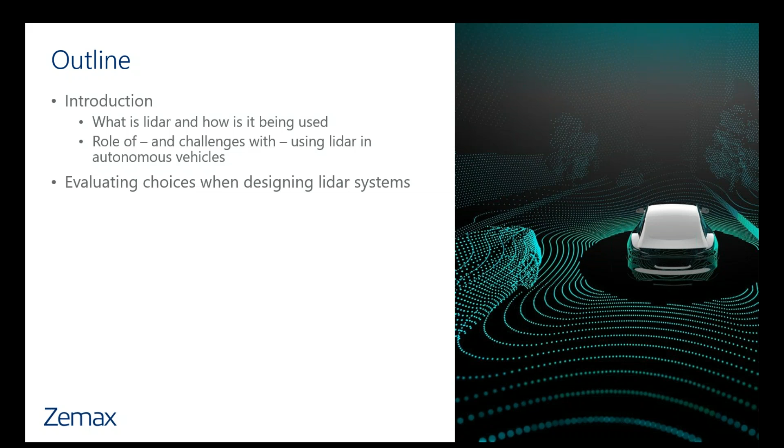And so I want to talk a bit about what drives some of those choices, what are some of those technical considerations that we have to think about when we're designing a LiDAR system, and how we can evaluate those choices and make those trade-offs using virtual prototyping, being able to quickly and efficiently use simulations in guiding the best design decisions that you want to make for any particular application.

We'll look at this actually through two simple but specific examples using the Zemax virtual prototyping software solutions. And then for one of those examples, we'll do a little bit of a deeper dive and look at the as-built performance and how as-built performance would affect the results that you would get from a LiDAR system. And so this is accounting for things like environmental effects on the system performance, optical tolerancing, so the manufacturability of the optical components and how that would affect the performance of the system, as well as starting to evaluate the impact of mechanical design on the system.

I'll finish up then by talking about my thinking on next steps for LiDAR systems that are used in autonomous vehicles, and then provide a brief summary.

So what is LiDAR and how is it used more generally? Well, LiDAR is just a method that uses light waves to determine the range or the distance to an object. It's very similar to radar that's been around for a long time, but instead of using radio waves, we're now using light waves. LiDAR is commonly used in a variety of applications.

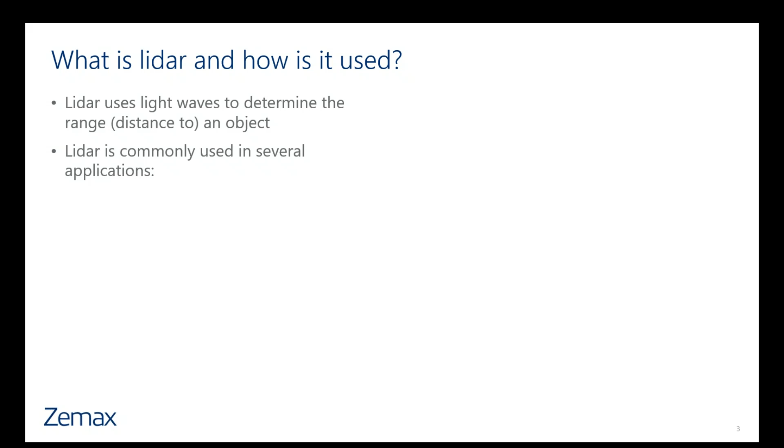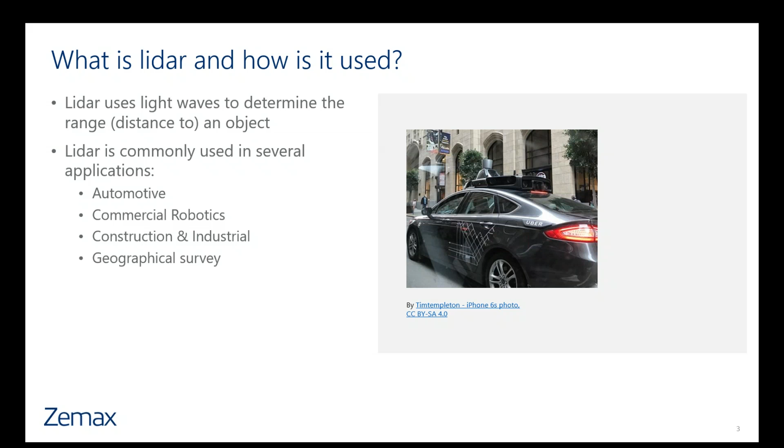These include the automotive industry, and as we'll be talking about here specifically in autonomous vehicle designs. But it's also been used with commercial robotics, inside of construction or industrial environments. As a tool for geographical survey, this is maybe one of the more common applications that users may be familiar with. And as we see here, this is an example of a topographical map that's been generated by the U.S. National Park Service using a LiDAR system. In a variety of military applications, and then finally also in commercial transportation, so trucking, railway, etc.

So LiDAR has been around actually for quite some time, but one of the key points that I want to make is that in many, if not most of these applications, the solution that's been implemented has been a custom and expensive solution. So it usually tends to be something that's very application specific and therefore at a high cost. And so one of the goals of virtual prototyping is to be able to come up with a solution that is low cost, that can be mass produced.

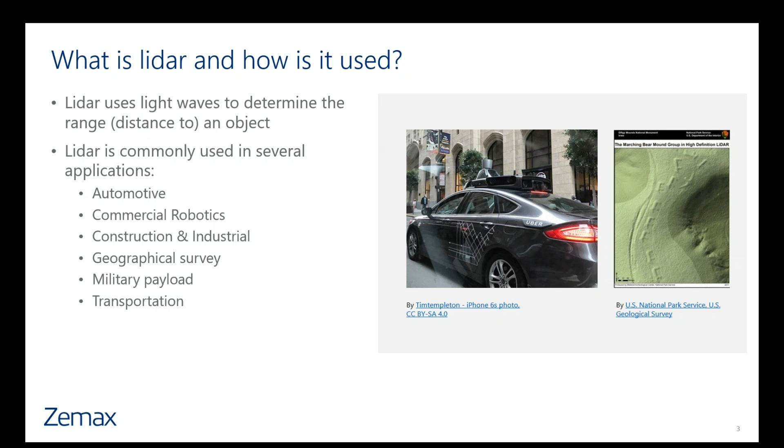Now, what would the role of LiDAR be in an autonomous vehicle system? I think we want to start by defining what we mean by autonomy.

There are international standards which define autonomous driving, ranging from level 0, which indicates full driver control with no automated assistance whatsoever, to level 5, which is full autonomy of the vehicle, in which the vehicle performs like a human driver under all conditions.

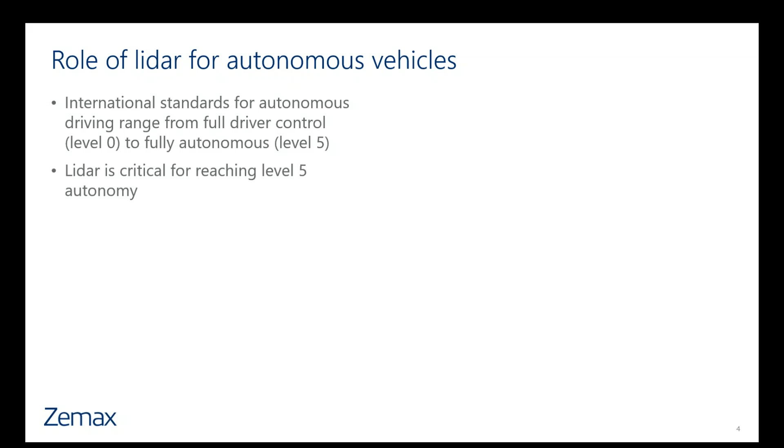LiDAR is a critical component for reaching this level 5 autonomy, as we'll talk about here in a moment. But it won't be the only component required to reach level 5. To reach this full autonomy, we really need a variety of systems.

These include short, medium, and long-range radar, as well as visible camera systems, ultrasound systems, and LiDAR systems. As you can see in this diagram, where LiDAR is thought to be most effective is really in this intermediate range of detection for the vehicle, where we're interested in collision avoidance and pedestrian and obstacle detection at ranges typically 30 to 100 meters, or about 100 to 300 feet.

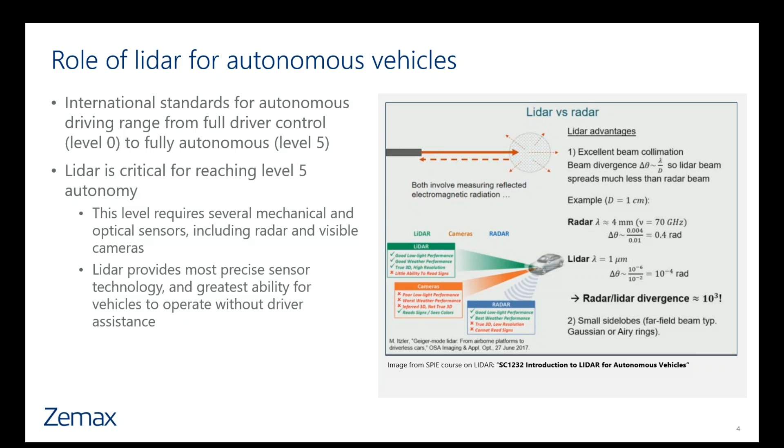Within that range, LiDAR provides the most precise sensor technology we have available. It has significant advantages over camera and radar within this range, resulting from the short wavelengths we're using for range detection, as opposed to the longer wavelengths used by radar systems.

What I've shown here, and I'll play a video shortly, is just a basic example built up within the Zemax OpticStudio software package to illustrate the concept of how a LiDAR system might work. This is an example of a pulsed scanning system.

What we have here is basically just a light beam illuminated from a system on a vehicle, as shown here. That light beam is going to be scattered off a target in the far field, with a pedestrian in the way.

By looking at the path length, which corresponds to the time the light travels as it goes from the source out to the wall, we can get an indication of the obstacles between the light and that target. Now, LiDAR systems, as I'll talk about a little later, are actually a bit more complicated than this, but I wanted to show this as a basic example.

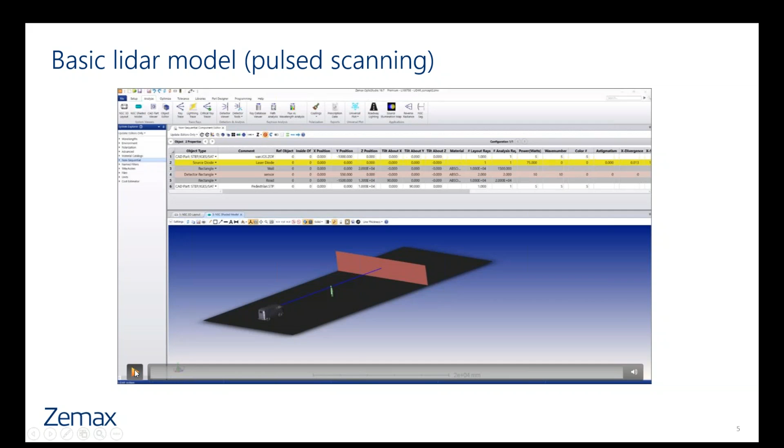In the software, we've set up a simple source where we can scan that source, and you can see that scanning occurring here as the beam moves across the target. We can then measure the distance that beam travels as it scans.

We can do that in a two-dimensional fashion using a tool within our software called the universal plot. This allows the user to define a two-dimensional scan of the beam, and in this case we're doing that over both the horizontal and vertical direction, in a range of about 2 to 3 meters in each dimension.

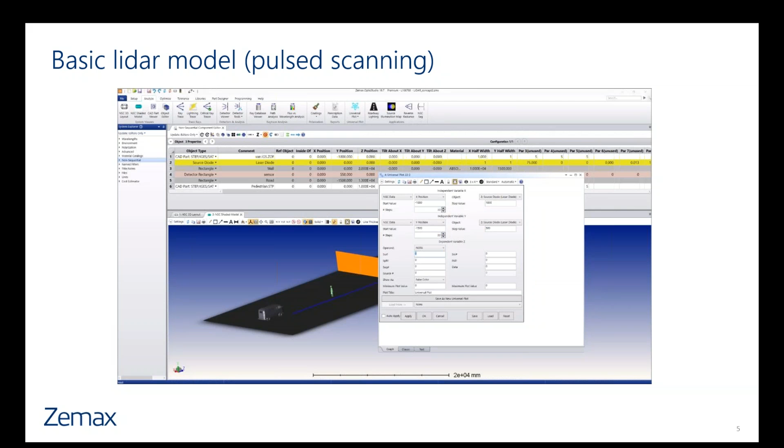Having done that, we can look at the path length the ray travels as it propagates, and we'll see that path length is affected by the obstacle in the field of view of the beam as it travels to our target. You can see here actually the outline of the pedestrian shown by this simple analysis.

So this is a very basic analysis that shows how a LiDAR system can work, by looking at the path length, or the time of flight, of the beam as it propagates from the source out into the far field.

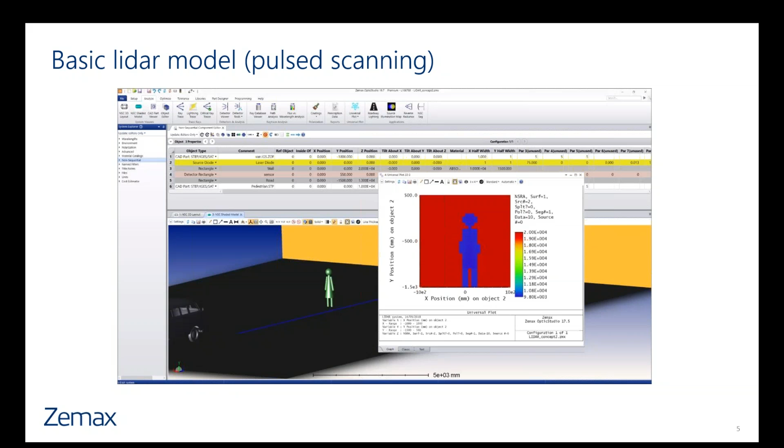Now, what are some technical considerations for using LiDAR in autonomous vehicles?

The first is that the systems need sufficient range to be able to capture information about traffic that's traveling at different speeds across the full field of view that's of interest. This requires that these systems have accurate measurements that have good resolution in the transverse, or perpendicular, direction, but over the full horizontal and vertical field of view.

By horizontal field of view, we mean that we want to be able to scan this full 360 degrees relative to the driver position, so that the LiDAR system should be able to see both in front and in back and along all sides of the driver.

We usually want a field of view in the vertical direction, or along the line of sight of the driver, in the range of about 20 degrees, starting from just a little bit above the driver's line of sight down to about 15 degrees or so below that line of sight. That's a typical vertical field of view required for the LiDAR system.

What we're looking for in terms of resolution is going to be much smaller than that. We're looking for the ability to detect objects or obstacles in that field of view with a resolution anywhere from a fraction of a degree up to a couple of degrees, maybe an order of magnitude smaller relative to the full field of view we're trying to capture. To translate that into numbers, for an object that might be 20 meters or about 60 feet away from the driver, we're looking at being able to detect objects that are about 7 centimeters in size.

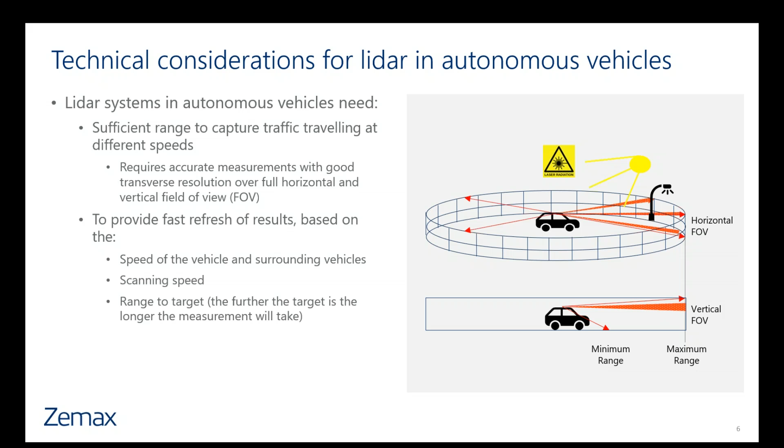Now, we also need this data quickly, because the scene that the driver is seeing is changing as traffic is changing, as the vehicle the driver is in is moving itself. We need a fast refresh of these results based on the speed of the vehicle and the surrounding vehicles. The scanning speed, the speed of the light source itself, will determine the resolution and accuracy of the LiDAR system, and the distance of the source to that target.

Some other technical considerations for LiDAR systems in autonomous vehicles are that these systems have to have robust performance in a variety of environmental conditions over the full lifetime of the system. We need to make sure we're collecting enough light from these various obstacles in the field of view, independent of weather changes or background conditions, such as the amount of ambient sunlight incident on the system. And again, as the detector ages over its full lifetime, which may be on the order of years, depending on the life cycle for replacement of these systems on the vehicle.

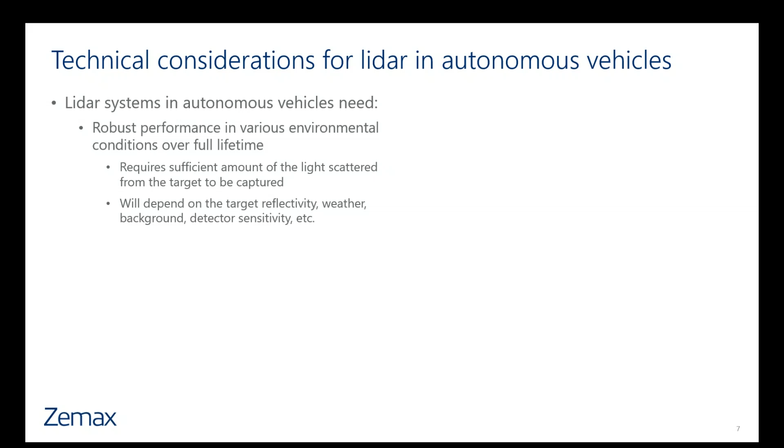Now I want to show a schematic that shows in a little more detail how some of the fundamentals of these LiDAR systems work, starting with the transmitter or lighting component. This is the light source that's going to illuminate the field of view and tell us what's out there in front of the driver.

What we have then is that light hitting the targets or objects in the driver's field of view and being scattered back to a detector on the vehicle itself. The amount of power received on the detector depends on how much power is on the target, and the power that reaches the target depends on factors such as the power of the laser, how much of that power can be transmitted through the atmosphere as a function of atmospheric conditions like weather, and the size of the beam we can achieve on the target.

The tighter the beam we can make on the target, the more power we can deliver on it, but we also need to ensure we're getting high enough resolution to capture all the information about the target of interest. To optimize for that beam size on the target, we often provide optics between the laser source and the target, to provide the right beam profile on the target itself.

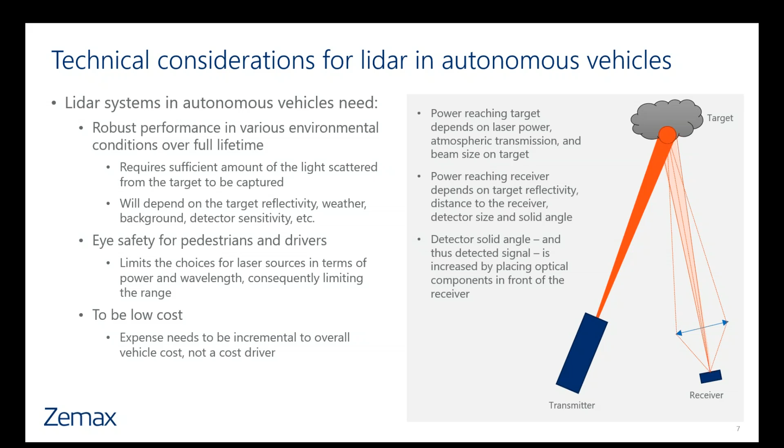So part of the exercise here is to come up with the best design and identify the best trade-offs to drive the cost down as much as possible.

Now, as I mentioned earlier, there hasn't been a clear-cut solution or winner identified. There are still a lot of players working on a lot of different solutions throughout the industry, involving different types of sources, different wavelengths, and different detector or sensor technologies.

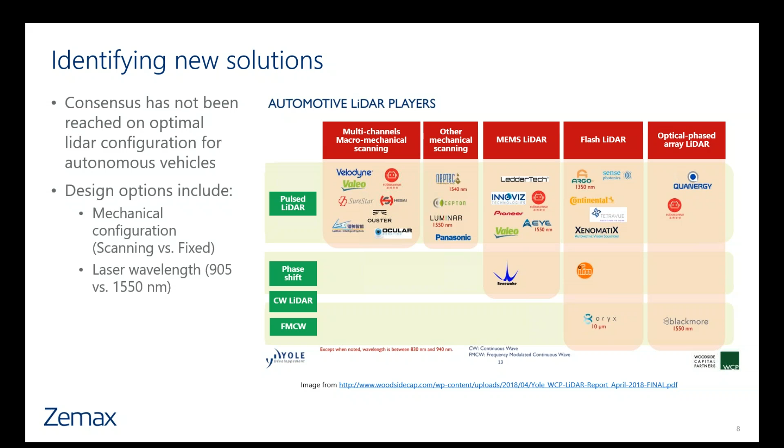I'll talk a bit about some of the design options available for LiDAR, including the mechanical configuration: whether you want a scanning laser or a fixed system, the wavelength used for the laser, and whether you use a pulsed system, as in my simplistic example earlier, or a continuous wave laser model. We'll discuss the pros and cons of each of these design choices.

Starting with mechanical versus flash systems. What we call a mechanical system—which I'll also refer to interchangeably as a scanning system—has basically a single laser on the vehicle that sends out a short pulse. We look at the time it takes for that pulse to hit targets in the field of view and return, so it's a time-of-flight measurement. To capture data over the full field of view, we scan that laser in a 360-degree arc around the top of the vehicle.

The advantages of scanning systems are that you can capture the full field of view with a single system, and these systems generally work at high resolution, giving very good accuracy. The disadvantages are that they include mechanical moving parts, making them more expensive and more sensitive to wear and tear, misalignment, optomechanics, and things of that nature.

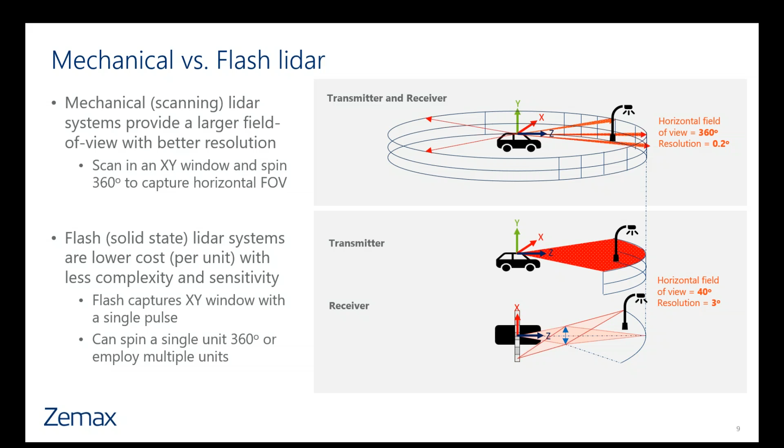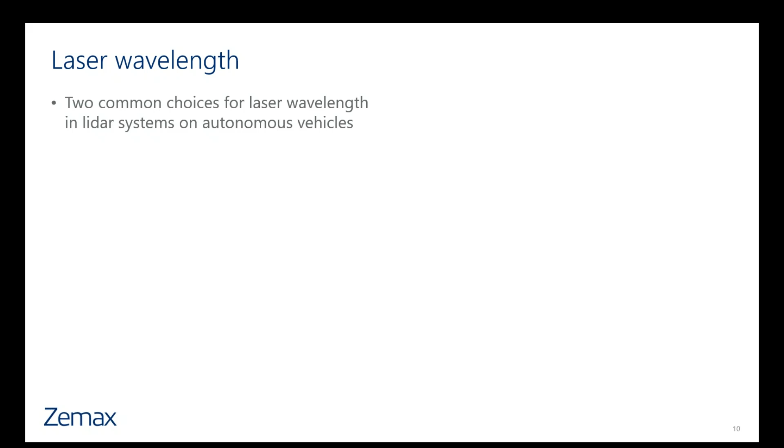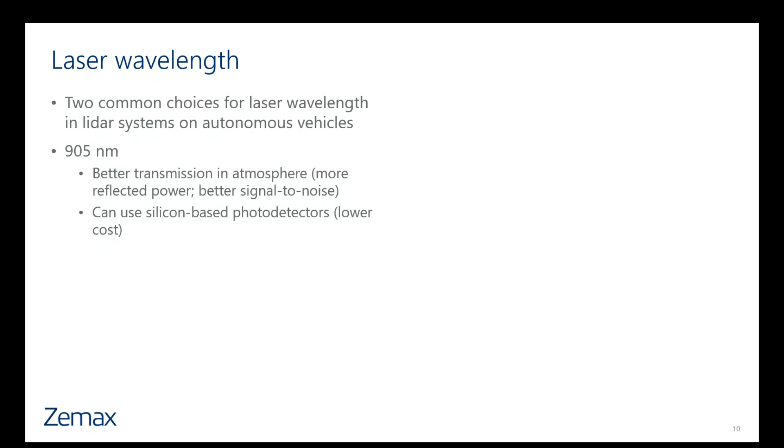Another design decision you can have in a LiDAR system is what laser wavelength to use. There are two common choices for wavelength in these systems. The first is 905 nanometers, closer to visible, kind of in the near IR. The advantage of these wavelengths is that you get much better transmission in the atmosphere, so you get more power returned to the detector and therefore a higher signal to noise. With these, you can use traditional silicon-based photodetectors, which can be purchased and implemented at lower cost.

This is just some data which speaks to the first point about transmission. The transmission through the atmosphere generally follows an exponential relationship, with a dependence on the distance to the target as well as an atmospheric extinction coefficient, which is a function of wavelength and of course the atmosphere and weather conditions. You can see from this plot of the atmospheric extinction coefficient as a function of wavelength that this value is smaller at smaller wavelengths and increases as you go to higher wavelengths. A smaller value here corresponds to higher transmission, so the lower wavelengths give you better performance in terms of transmission.

Now, the disadvantage is that the eye tends to be more sensitive to these lower wavelengths, so you do have concerns with eye safety. As we go up to higher wavelengths, up at 1550 nanometers, this is where you have better support for eye safety. You have less probability of that light coming back and hitting the retina in the back of the eye, and therefore you can use higher power lasers at this higher wavelength because less of that light makes it back to the vulnerable retina. The other advantage of using the higher wavelength is that there tend to be lower levels of ambient or background light at these wavelengths, so you don't have to worry about noise coming from sunlight or other environmental light sources contaminating the detector signal.

One of the disadvantages of using the higher wavelength is that it requires non-silicon photodetectors, but there have been some advances made recently in the use of avalanche photodiodes with high efficiency that can be used to capture light at this wavelength. So we are seeing an industrial shift of LiDAR systems moving more towards these higher wavelengths as a result.

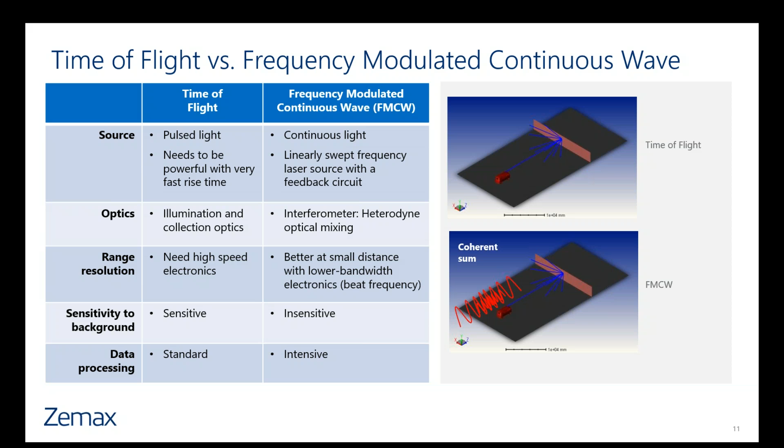But again, these are all the kinds of design decisions that users, or companies, need to make as they're designing LiDAR systems for autonomous vehicles. And as I said, there's really no clear choice or clear solution in the marketplace.

And so as we think about what's driving cost, and that's really what the company is thinking about in terms of their bottom line, these are issues like system complexity, performance, what the system performance requirements are, and the ability to get those systems into mass production.

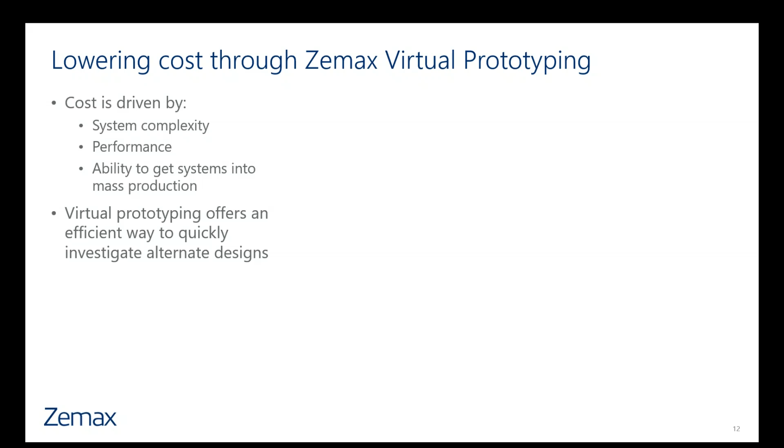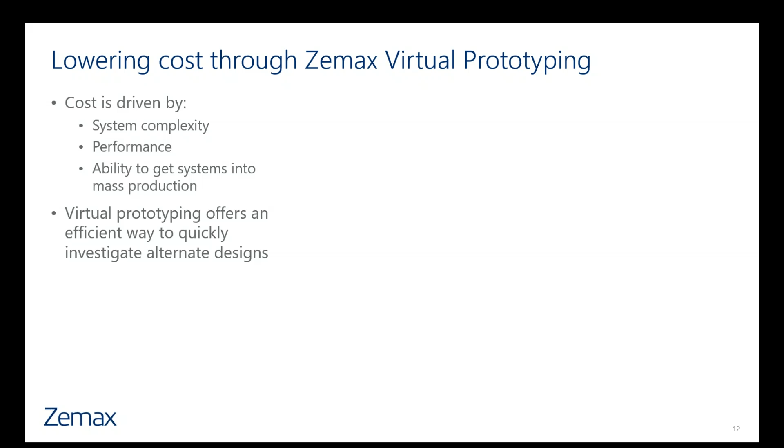And really the most effective way to determine what the right system is for the application a company may be employing is to use virtual prototyping. And what we mean by that is to be able to use simulation through connected software tools that give you end-to-end information about your design.

This can be through the user interface. This can also be through programmatic investigation of systems using application programming interfaces. But there's a lot of flexibility when we talk about using virtual prototyping and simulation to be able to design these systems virtually, to find what the best trade-offs are going to be for the application of interest.

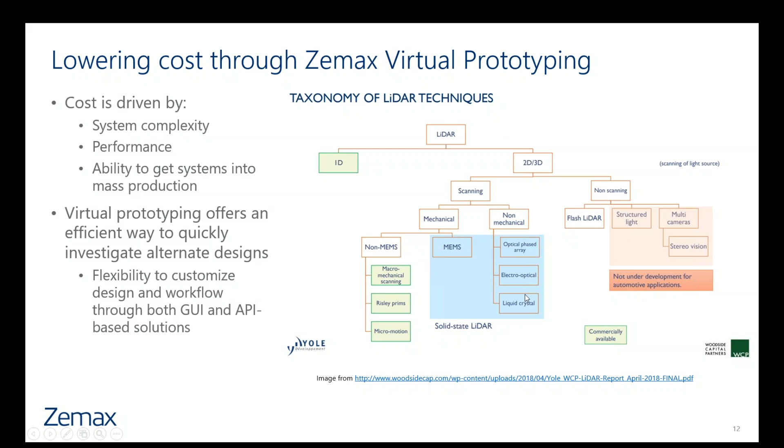And this plot here is really just meant to show the variety of options that are available as we think about LiDAR systems, and that really the best way to investigate this entire solution space is through simulation and through virtual prototyping.

What I'm going to be focusing on now in the remainder of this webinar is going through a couple of different examples where we'll use the Zemax software tools to look at some systems you can employ for LiDAR. One will be a mechanical spinning pulse system, as I showed earlier. The other will be a flash solid-state LiDAR pulse. These are similar systems in that they're both based on time of flight measurement, but they have slightly different specifications that I'll get into some details on.

For each of these designs, we'll provide the system setup within the software, as well as evaluate and optimize the performance. And then for the mechanical LiDAR system itself, we'll go ahead and do a deeper dive, looking at the environmental impact on performance, the effect of tolerances, and preparing the system for optomechanical design.

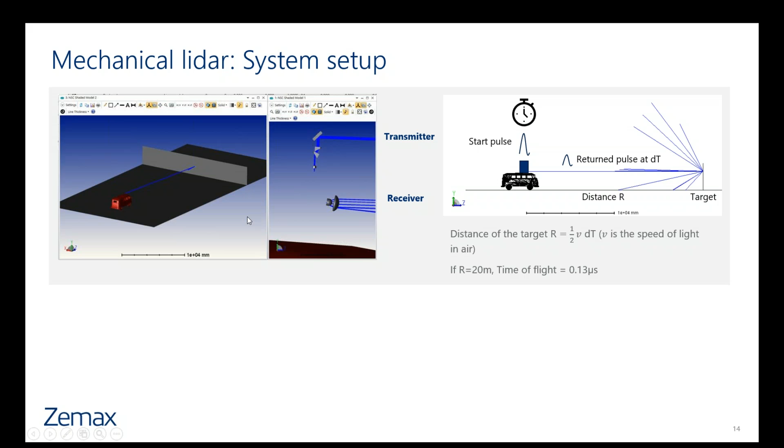So this is just an example of the mechanical LiDAR system set up within the Zemax OpticStudio software. You can see the scanning taking place here through this GIF. We're doing just a short scan, not over the full 360-degree field of view, but just as an example, over a shorter field of view, to show how the components themselves would move as we try to scan the system through the full field of view.

In this case, the source is just a single laser diode source. That source would be scanned in principle over a full 360-degree field of view to provide information about the horizontal and vertical position of the target, the X and Y, and then the time of flight—the time it takes for light to go from the source to the target and back—gives us information about the distance or range to the target.

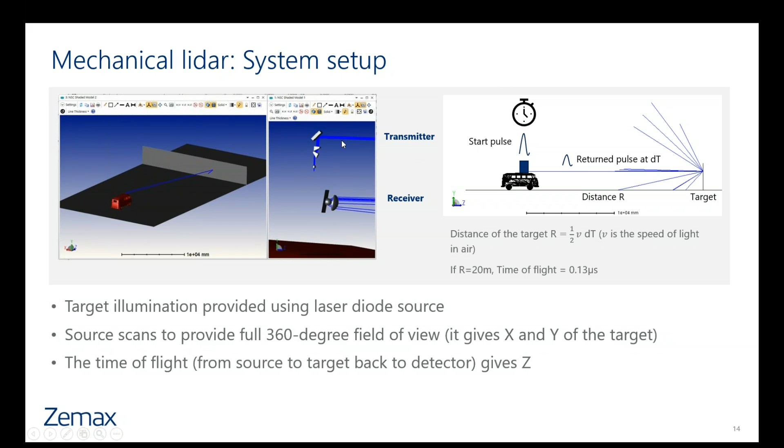Now, as I mentioned before, with these time of flight or pulse systems, we often have optical components both in front of the transmitter as well as in front of the receiver. But we can model these within the software—we can actually model each of these optical components separately.

So we can have a model for our transmitter optics, where the goal is to generate a collimated beam that reaches the target with a small spot size, so that we can have high resolution on the target. In order to generate this beam, we'll have optics which include both aspheric lenses and prisms. So really want to emphasize that free-form optics play a critical role in the design of these optical systems within LiDAR.

In this particular case, we're using prisms that we've taken from the Thorlabs catalog, and they've been implemented in the software as CAD models. But OpticStudio has the ability to support both CAD as well as native geometries for freeform optics.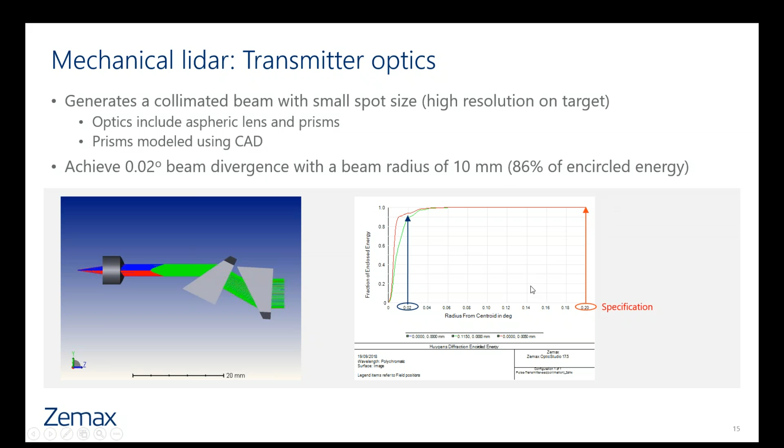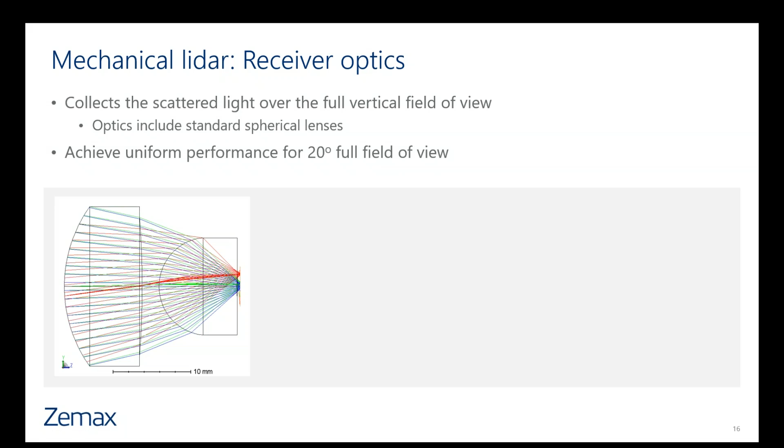But even with these traditional components, we're able to achieve uniform performance over a 20-degree full field of view. Again, in this system, we weren't doing a full 360-degree scan—we were just looking at a limited scan. But even so, we were able to achieve good performance with this two-lens system.

Here you can see a plot which shows the beam size received back on the detector as a function of that field of view. You can see that it's fairly uniform over the field of view—this is showing the half field of view. And if we look at this in terms of the encircled energy, how much energy is captured within the field of view, you can see that the majority of that energy is captured out to a 10-degree half field of view before we see any significant drop in the energy collected at the receiver.

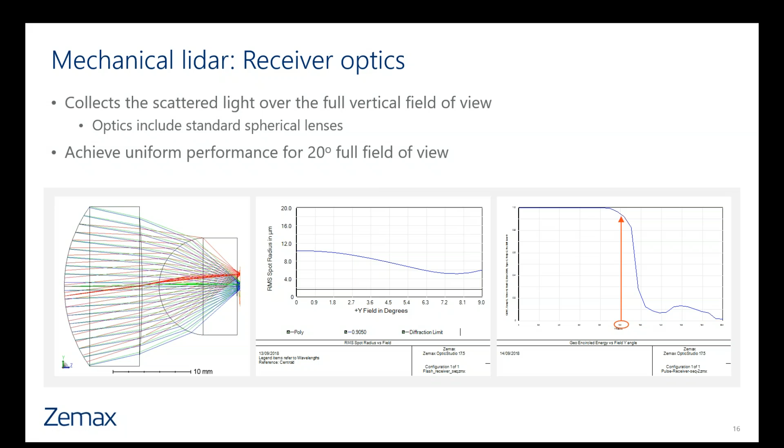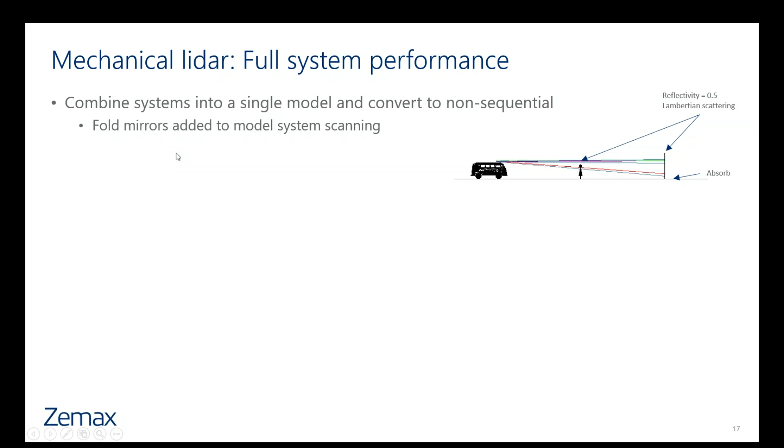Now, in order to evaluate this full system all up, we can combine the transmitter optics model and the receiver optics model into a single model by converting this system from what we've been using previously, sequential mode in OpticStudio, into a full non-sequential design. What I show here is just a schematic of what the system is meant to look like. We put together the full system into a single model where we also include fold mirrors in order to model the system scanning.

This is to account for the fact that we need to capture data over the full 360-degree field of view. We can see now the detector results shown as we look at these different scan angles as we go over the full field of view.

One of the most useful pieces of information in putting together the full system into a single model is to look at the amount of power that's received back in the system. So rather than looking at the beam size, we're looking at the energy distribution on the detector.

In this case, we're looking at the results for a single configuration, a single scan at 45 degrees, where the power of the source is 75 watts. We can see that the power is significantly reduced. This is really one of the challenges we have with LiDAR systems in autonomous vehicle design: while the power of the source may be on the order of watts, the power detected at the receiver is on the order of microwatts. So we really have to have very sensitive detection in order to see this signal.

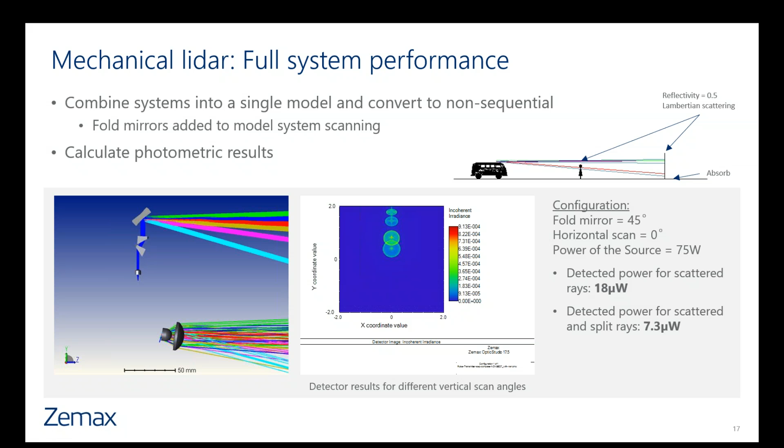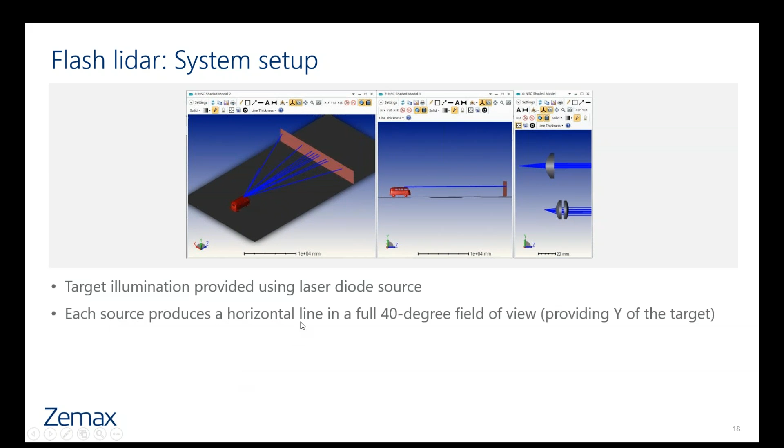Each source within the array will produce a horizontal beam over that full 40-degree field of view, so within a single pulse of that source, we capture information about the full field of view. The receiver then focuses light onto a detector array, which tells us the horizontal position the light came from, and by knowing which source the light was emitted from and where it falls on the detector, we can get the XY, or horizontal and vertical, position of the beam on the target. And again, this is a system where we use time of flight to measure the distance to the target.

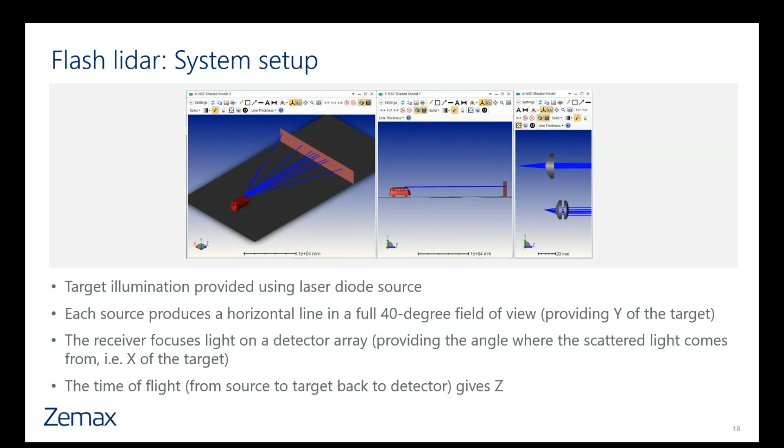Just as we've done for the mechanical LiDAR system, we can break this system up into two separate components that we model in so-called sequential mode of OpticStudio. The first are the transmitter optics, the optics in front of the laser source.

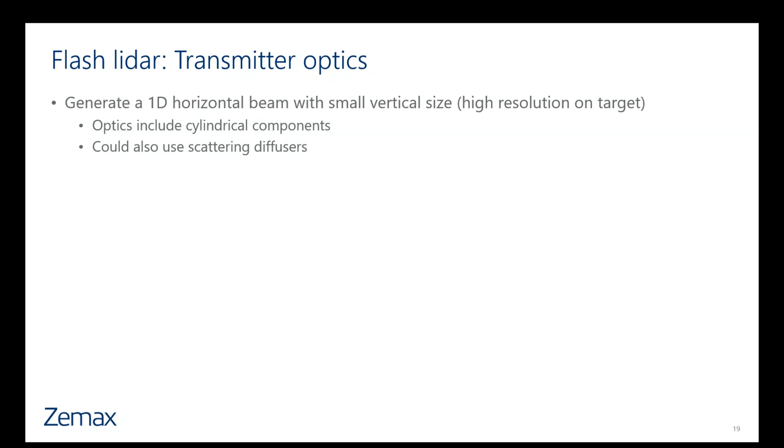In this case, our goal is different than it is in the mechanical LiDAR system. Here we're looking to generate not a small beam size on the target, but a horizontal beam, because we want to capture full information in the horizontal field of view with a single pulse. But we still want high resolution on the target, so we still need a small vertical size to that beam. In this example, we're using cylindrical components, but another option could be scattering diffusers. There's a variety of options available, and either could be modeled within the OpticStudio software package.

For the system as we've built here, we were able to achieve roughly a half degree full field beam size over that 40-degree field of view. This is looking at three different beams, meant to represent three different sources in the source array for the flash system. You can see each has a really tight beam size in the vertical direction, but which are well separated. This is a key piece, because we need to make sure the beam, as it reaches the detector, doesn't overlap, so we can get discrete information about the horizontal and vertical position from each beam separately.

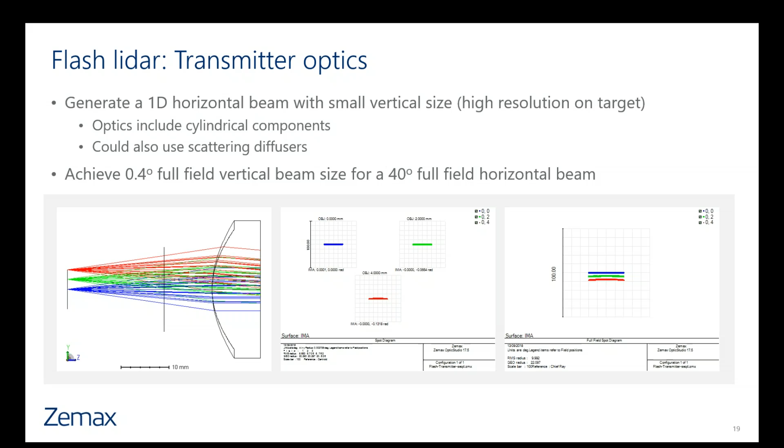Now we have a separate model again for our receiver optics. The goal is for the receiver optics to collect the scattered light over the full field of view at the required angular resolution. The specification in this model is an angular resolution of 3 degrees in the horizontal plane, and in the vertical plane to collect all of the light over the full field of view.

This is a schematic showing the lenses we've used to model the receiver in the horizontal plane, again just using spherical lenses in this particular example to keep costs down. We're actually able to achieve a vertical angular resolution better than the specification, getting a 1 degree field of view.

You can see here from each of the diode sources being captured on the detector a clear separation between the sources, which indicates we're able to discretely and with good definition capture information from each source separately. This is another way to see that information, looking at the enclosed energy received on the detector - 100% of that energy is captured for each diode source before we begin to capture any information from any of the other sources.

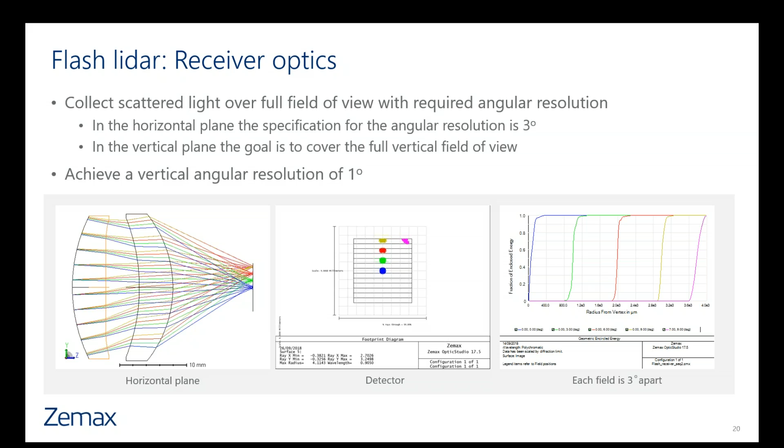Now we can put these two systems that have been modeled separately back into a single system to evaluate the full system performance. This is done by combining each of the individual systems into a single model and converting that model into the so-called non-sequential mode of OpticStudio.

In this case, all of the sources have been modeled simultaneously, and you can see all of those sources illuminating the target simultaneously. The receiver then samples different parts of the target on different pixels within the detector array, and that's how we can distinguish information about the horizontal and vertical position of where the light struck the object.

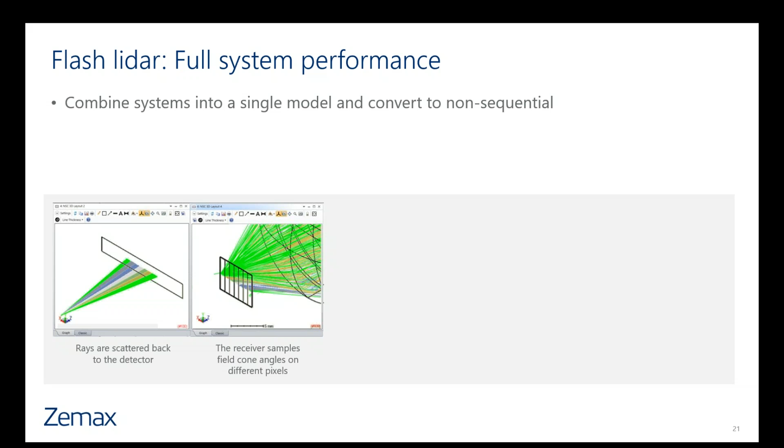One of the advantages of looking at this model in non-sequential mode is being able to evaluate the photometric results, to look at the power received on the detector. For a source at 75 watts, the total power on the detector is down in the microwatt range. In this system, there's about 40% less power received on the detector relative to the equivalent mechanical LiDAR system.

So in this system, we see about 11 microwatts received on the detector as opposed to 18 microwatts in the mechanical LiDAR system. It would be a bit more sensitive to signal to noise in this case as a result.

Another potential issue with this system is if we look at the actual power distribution on the receiver, you can see it's not as uniform as we might like. We'd ideally like to see a nice flat top of power on the detector. To achieve that more uniform distribution, we might need to redesign the receiver optics to include more sophisticated components, like diffraction gratings or other micro-optic components, to tailor the energy distribution on the receiver to be more flat and uniform.

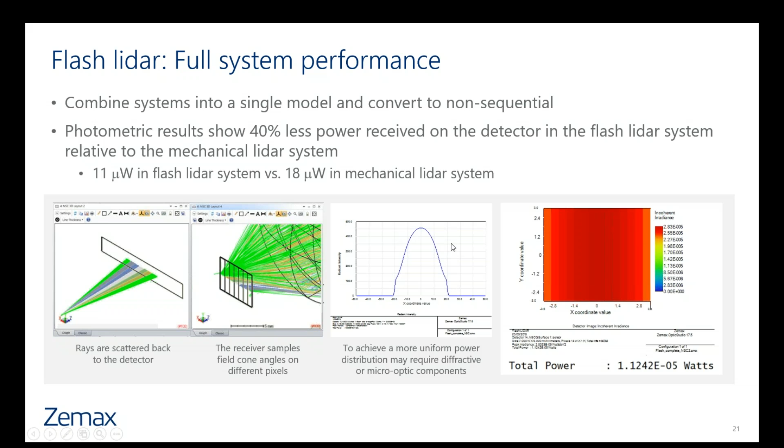Now, for the mechanical LiDAR system, we'll talk a little bit about how we would move this down into as-built performance, or modeling the as-built performance. One of the first effects we might want to consider is environmental effects.

Right now, within the simulation, we can look at how we affect both the reflectivity of the obstacles that light is being scattered from, as well as the model that characterizes the scattering distribution. The current model used in the previous analyses assumes a target reflectivity representative of standard aluminum, as well as an idealized scattering model.

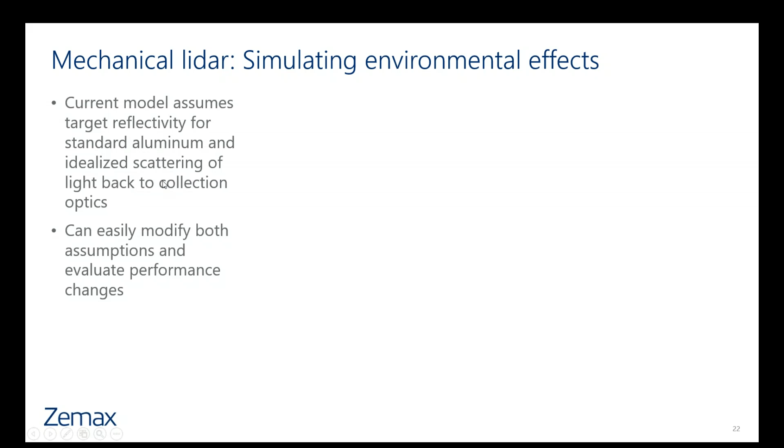But we can easily modify both of those assumptions. Within the interface of the software, we have options to change the coating on any of the components in the model, and that's what allows us to change the reflectivity within the model. We can also change the scatter model being employed - so from this ideal Lambertian model, we have a couple of different options that I'll go through on the next slide.

One of the points I do want to emphasize, and I'll also bring this up on the next slide, is that both the reflectivity and the scattering models can be modified using other idealized models, but they can also be based on measured data. So we can actually incorporate real-life measurements into the virtual prototyping simulation.

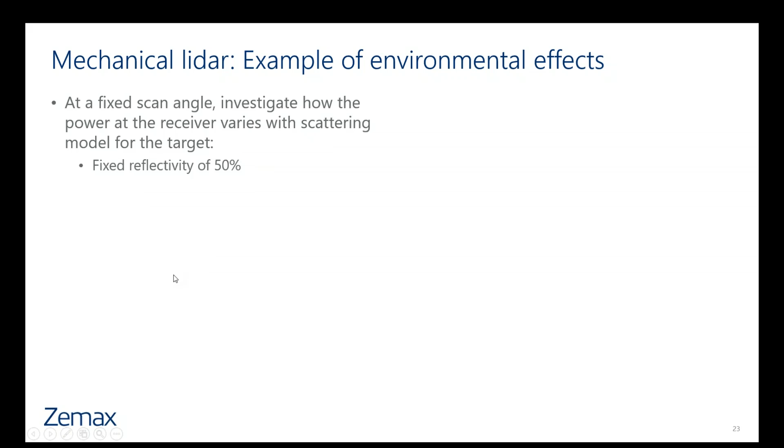So this is an example. What we're going to do is, for a fixed scan angle of the system, investigate how the power at the receiver varies as we change the scattering model at a fixed reflectivity of 50%. We'll start with our idealized model as a baseline, a Lambertian scattering model in which the scattering is uniform across the field of view. In that case, as we saw before, the total detected power is about 18 microwatts.

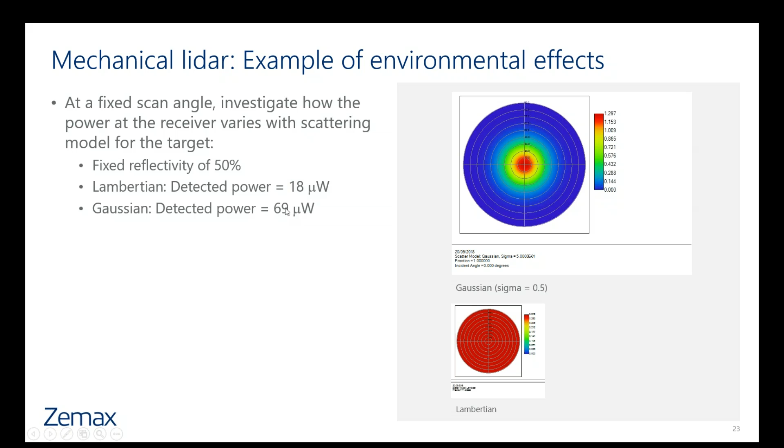If we change the scattering model to a more peaked distribution, a Gaussian distribution in which light is scattered primarily along the same direction that the light hit the obstacle, then the power returned at the receiver increases significantly. Now, whether or not this kind of peaking would occur on the materials in the field of view would depend on the environment in which the autonomous vehicle is operating, but it does show the sensitivity that the system has to that scattering distribution.

If we look conversely at a model in which, even though there is some peaking, there's still a larger distribution of light out into larger scattering angles but in a non-uniform fashion, this is actually a situation in which the total power on the detector decreases quite substantially.

This is a situation where we're actually using measured data to model the scattering distribution. This is a measurement for brown vinyl, which might not be the most appropriate data for the outside environment — it's actually a measurement of material you might have inside the automobile, like leather seats or the dashboard. But it shows that you can use measurements like these within the software to evaluate the performance of the system.

Again, this is just one case where we're looking at different scattering distributions and their effect on power or signal at the receiver. We could also investigate the effects of reflectivity in the same way, using either idealized or real data.

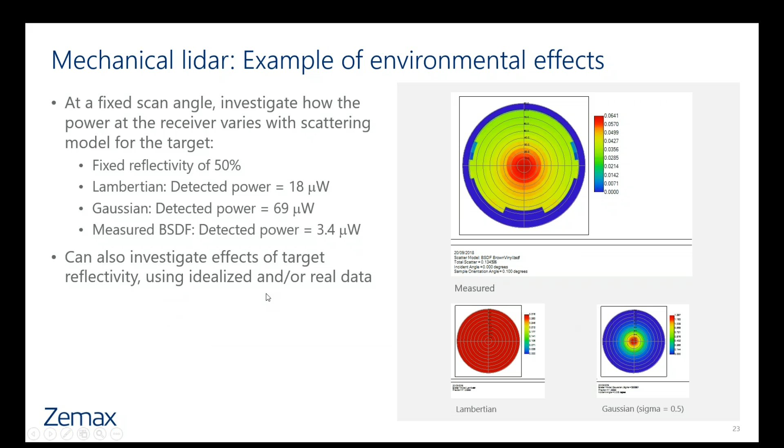The last topic I wanted to talk about with the LiDAR system is the effect of tolerancing, and I'll spend a little time on what we mean by that. The resolution we have on the detector will be limited by the size of the laser spot on the target, so how well we can resolve objects in the far field depends on that beam size achieved on the target.

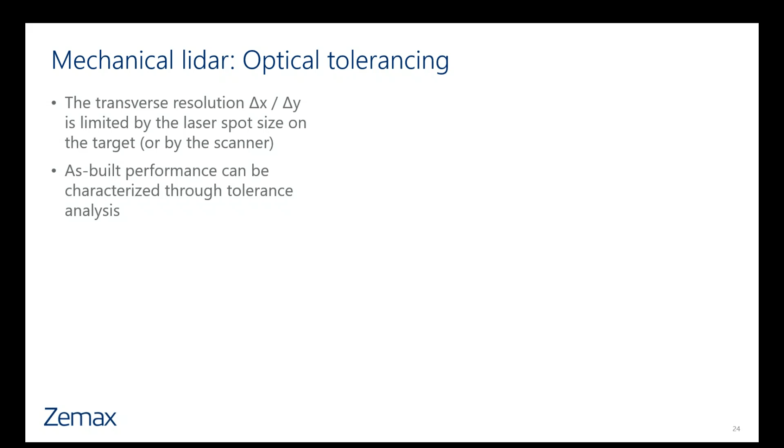In the nominal system, our goal was to achieve a beam size of about 7 centimeters for a target about 20 meters away. But when we think about as-built performance, we want to characterize what we'll really achieve as we account for effects of manufacturing and assembly in the system.

Within the software, there are a couple of different modes to look at how these imperfections in the system can affect performance. One is called sensitivity mode, where we look at each perturbation or imperfection individually, but in a worst-case scenario. The sensitivity results represent the worst-case performance as we think about what could go wrong during manufacturing or assembly, and it helps identify the critical components the system is most sensitive to.

The Monte Carlo tolerance analysis allows us to look at all of the imperfections or perturbations to the system simultaneously, but in a more statistical manner. That allows us to see how these imperfections might interact with one another, giving more information about what we'd get in a high volume or mass production environment.

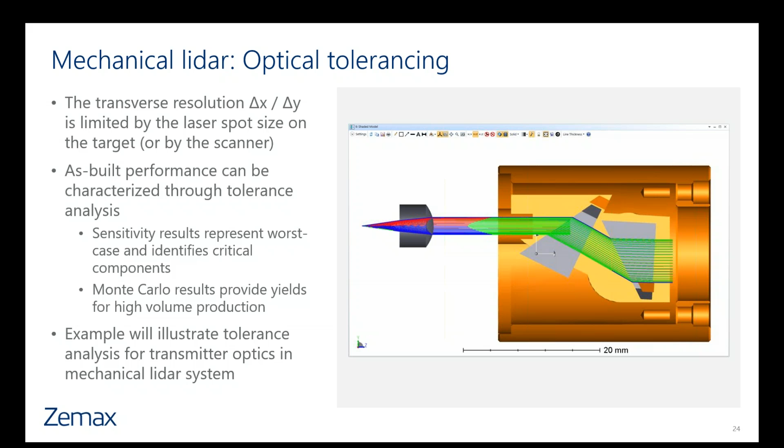What we'll go through in the next few slides is an example where we'll look at tolerancing just of the transmitter optics that were used for the mechanical LiDAR system. We'll look at both the sensitivity and Monte Carlo results to see what useful information those give us about this system and what we need to think about as we're manufacturing and assembling it.

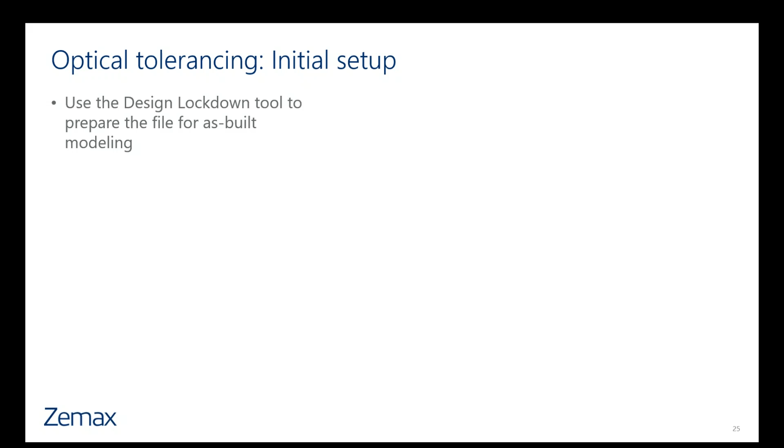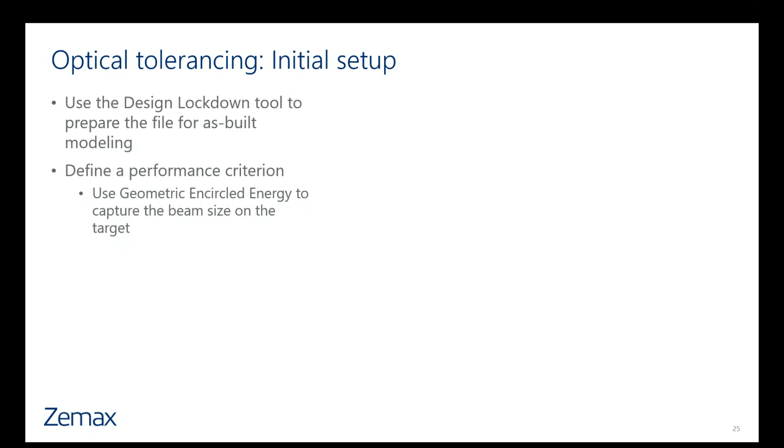The first thing we need to do is an initial setup. There's a tool within OpticStudio called the Design Lockdown tool, which is used to prepare the initial design for as-built modeling. We then need to define a performance criterion - what metric we'll use to define how the imperfections or perturbations introduced as part of the tolerance analysis affect the results. In this case, we'll use a metric called geometric encircled energy, which gives us information about the beam size on the target.

We then can run a sensitivity analysis. This is an analysis in which we look at each of these perturbations individually, and then we assume that all of the perturbations will happen simultaneously, but independently of one another. So effectively, each of the perturbations can all add together to give us the worst case scenario.

What we can see from the results are some of the things we're most sensitive to - actually these thickness perturbations, as well as some of these element tilt perturbations. These are some of the perturbations that this system is most sensitive to, and we'll investigate this a little more as we get into the Monte Carlo results.

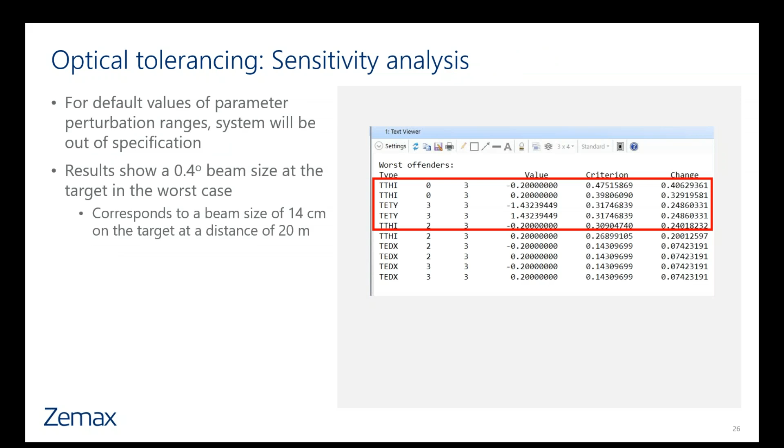One of the next steps we can do within the software is figure out what we're most sensitive to, and how to restrict the range of allowable perturbation for those things we're most sensitive to, in order to still stay within the design specification. Whereas we may have initially allowed, as we saw a couple slides back, these thickness perturbations to have a range of plus or minus 0.2 millimeters, that was clearly way too loose a perturbation to allow in this system.

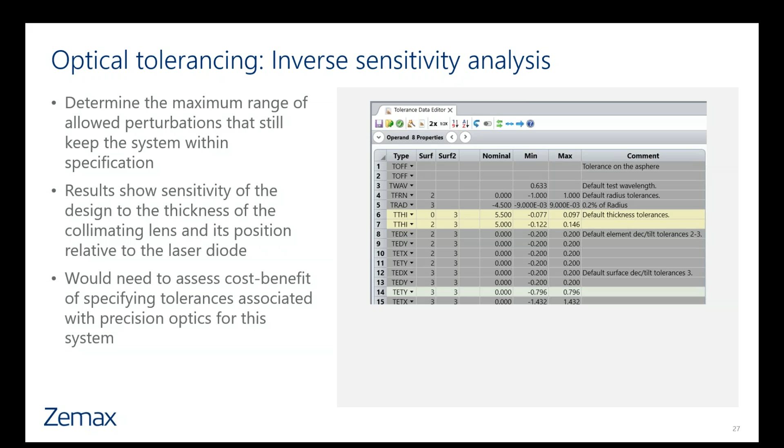Now, the challenge with doing this is that we would incur more cost in the manufacture of these lenses in order to achieve these so-called tighter tolerances. So we would need to really assess the cost benefit of whether it's worth having these tighter tolerances for these components, or whether we'd need to go back and consider a redesign of the system to create a nominal design that was less sensitive to these perturbations. That would be a design decision that the engineer would have to make as they go through their analysis.

What I show here, just as an example from one of our partners, Optimax, shows traditional ranges for so-called commercial precision and high precision tolerances. The range of tolerances we're looking at here are starting to fall within the precision and high precision category, which of course incur additional cost as you go from left to right in the manufacture of these components.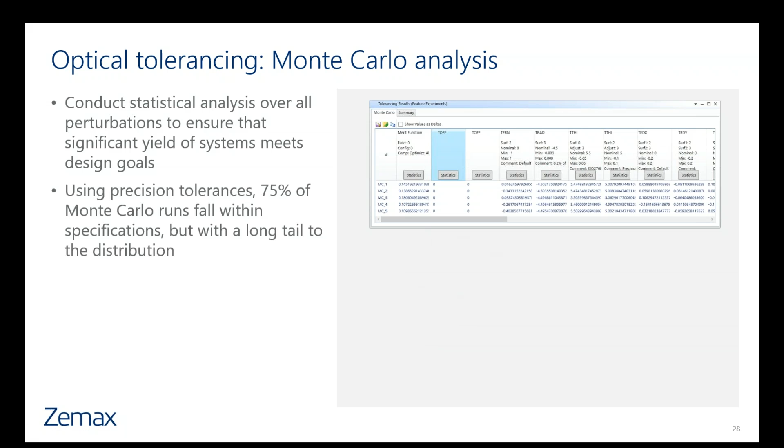Then we can look at this in a more statistical manner. What we find is that from the Monte Carlo analysis, even using the precision tolerances that our inverse sensitivity analysis gave us in the previous results, only 75% of the Monte Carlo runs fall within our specification of 0.2 degrees. There's a long tail to the distribution, you can see.

So many of the runs do fall within the specification, but there's a long tail to that distribution of runs that do not. Again, we would need to consider whether the appropriate design choice would be to tighten the tolerances even further, or to go back and consider a redesign of the nominal system in order to improve the performance relative to the as-built specification.

We can see that in this case, we're setting up the system to do 400 Monte Carlo runs, but that number could actually be significantly larger if we wanted. It's just really a function of the amount of time that you wish to spend.

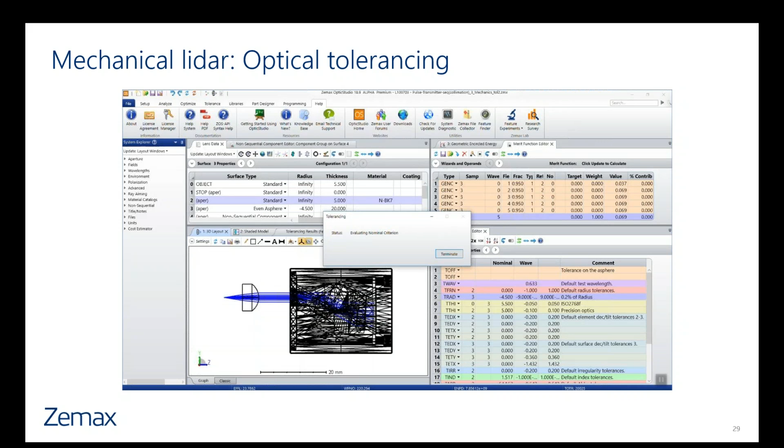For 400 runs, we can generate this data almost instantaneously, and you can see here results for each of these Monte Carlo runs. Those results are then easily exported to Excel to generate the statistical analysis that I showed previously. But if you were willing to invest a little more time in this analysis, that number of Monte Carlo runs could be increased to the tens of thousands, hundreds of thousands, or even larger.

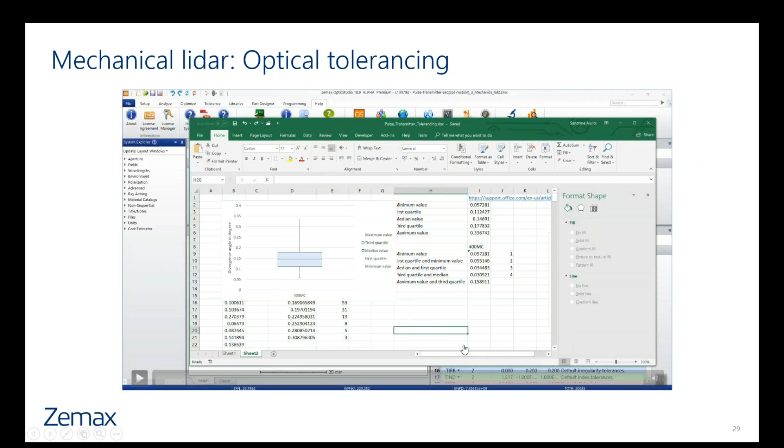The last thing that I want to dive into with the mechanical system is to talk about the effects of optomechanics, because everything that we've been talking about to date has really been just looking at the optics themselves. But of course, these optics are going to need to be in some kind of a housing or packaging system.

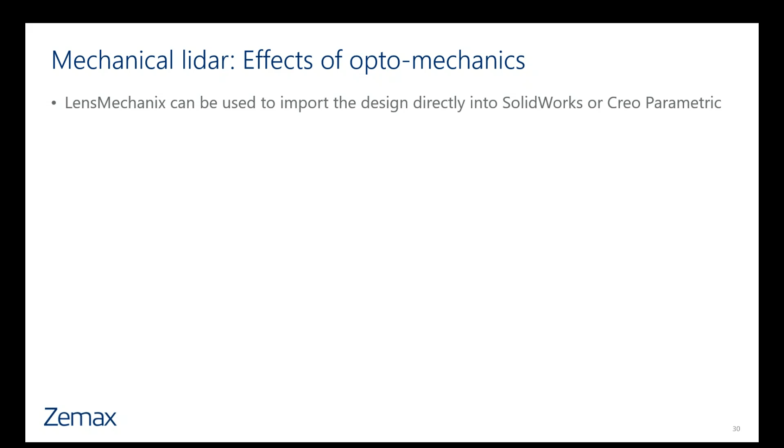Zemax offers a tool called LensMechanix, which can be used to import the optical design directly into SolidWorks or Creo Parametric, where the mechanical engineers can then start to add the optomechanics, the mechanical housing and packaging, to the system. LensMechanix has a great benefit in that there's no need to translate the optical components to CAD. Those optical components can be read directly into the CAD software through the LensMechanix add-in.

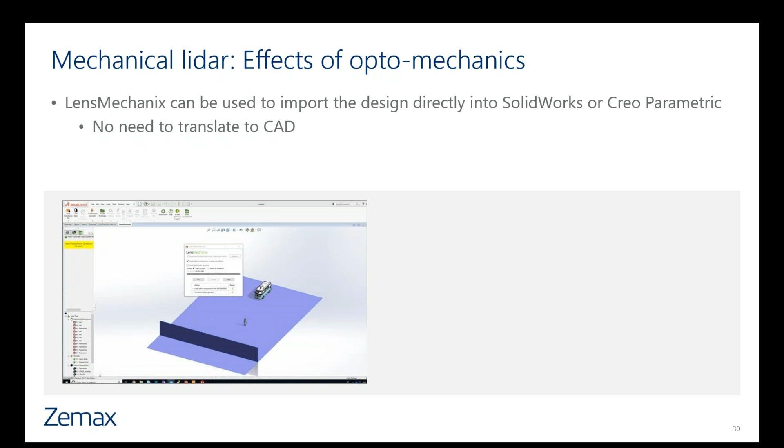Within LensMechanix, we offer the ability to look at sensitivity to things like system wavelength, which is what we're trying to show here, where the mechanical engineer could actually probe different wavelengths in the system, can change ambient conditions as well, such as system temperature, pressure, etc., and that can all be investigated.

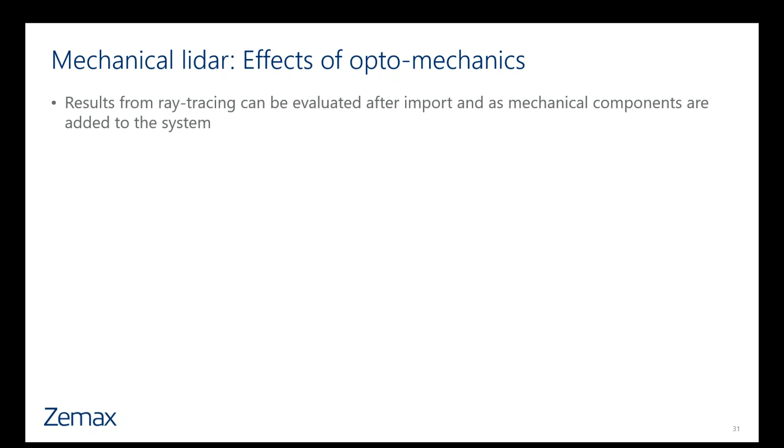The real key value of LensMechanix is that you can actually do optical ray tracing within the CAD environment, after import of the optical components, just to evaluate how that import has worked, but also as mechanical components have been added to the system.

So this is just a screenshot showing a ray trace in action, so you can see that we're actually running a ray trace. It's in progress, it's been about a minute here, where rays are actually being traced through the system to evaluate the optical performance of the system inside of the CAD environment.

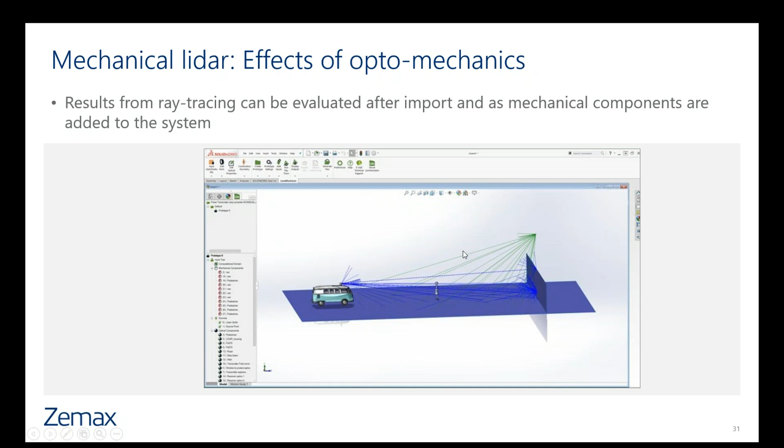Once that ray trace is complete, you can actually see those rays within the layout plot. Zooming in here on the housing of the transmitter and receiver optics, you can actually see those rays being illuminated from the transmitter, being collected by the receiver, and how those rays might interact with the housing or the other mechanical components in the system.

So LensMechanix in this case really has an important key value in the design of this system, because you can really begin to account for the manufacture of the system and how that manufacture will impact the performance of the system.

Just finally, I want to talk a little bit about what I envision as some next steps for LiDAR. Some of the things we haven't talked about in this webinar, but will play a key role, are structural and thermal analysis of the optics and optomechanics. These can include changes in the ambient environment, whether transient or steady state, and analysis of wear and tear over the system lifetime.

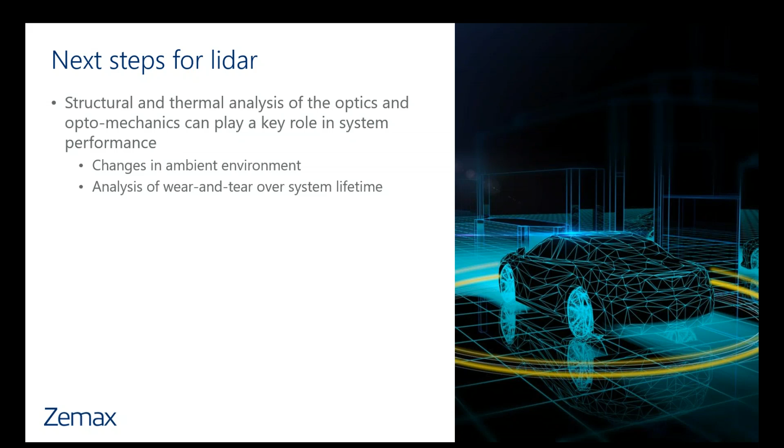Zemax is currently working on tools to allow data from finite element analysis programs to be imported back into OpticStudio, to be able to do this kind of analysis of the structural and thermal impact on the system.

Also, if we think longer term in terms of how LiDAR can be impacted by cutting-edge technologies, machine learning is one where we can think about training detector systems to recognize common objects or common signals, to try to improve the efficiency of those systems and increase the signal-to-noise ratio, which right now is very, very small for these LiDAR systems.

So just in summary, LiDAR is a critical component for autonomous vehicles as we move from level 0 to level 5 of autonomy. But no clear solution has yet been identified for LiDAR systems for all cases, and that's where virtual prototyping can play a key role in helping identify those systems.

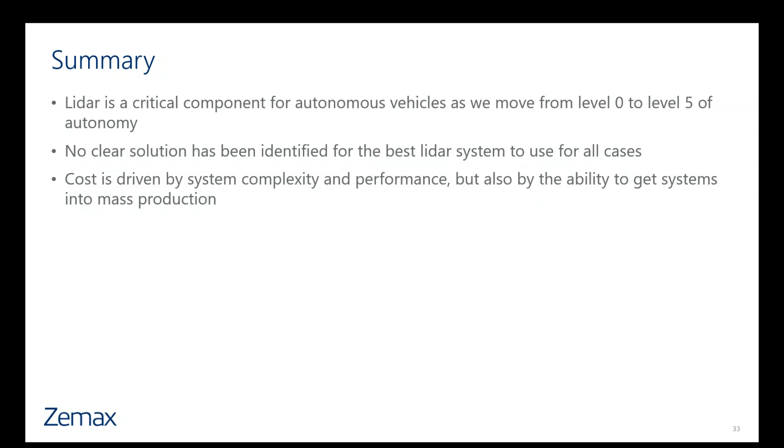Cost of these systems is going to be driven by complexity as well as performance requirements, but also by the ability to get these systems into mass production. And as I mentioned, virtual prototyping really offers a quick and efficient means for exploring existing solutions and identifying new solutions for LiDAR that can be mass produced.

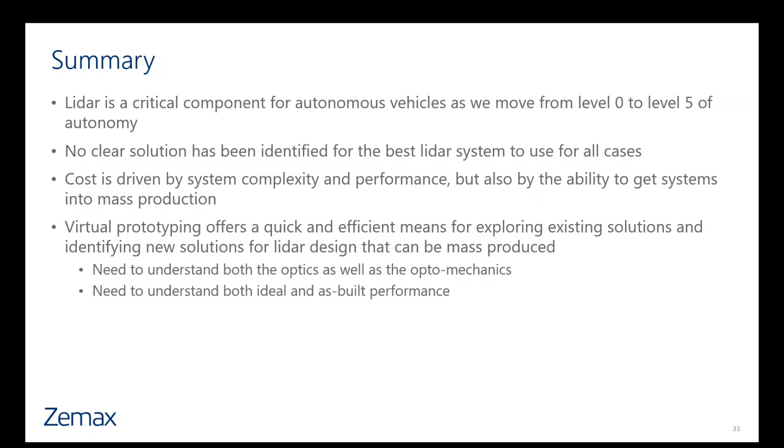As we go through virtual prototyping, we need to understand both the optics as well as the optomechanics, and we need to understand the performance of these systems under nominal or ideal conditions, as well as as-built.

And then finally, I just want to leave with the fact that companies which are using virtual prototyping are really those companies which are leading the industry in the design of cutting-edge, state-of-the-art LiDAR systems.

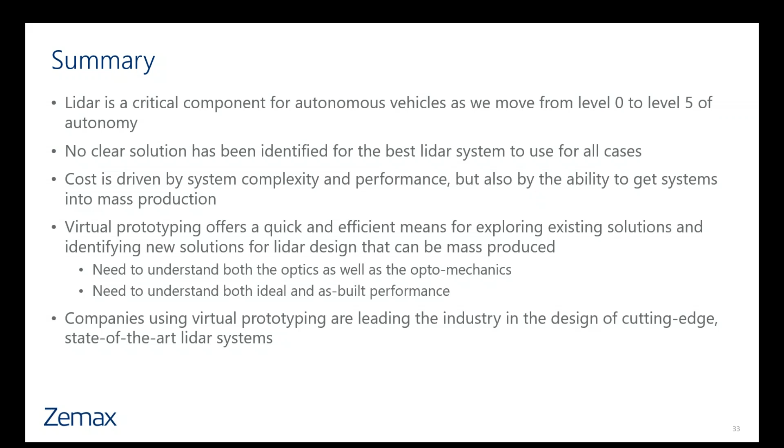So with that, again, just an introduction here to the two software packages that are part of the Zemax software suite, OpticStudio and LensMechanix, and then hopefully some time for questions. Thank you for your attention.